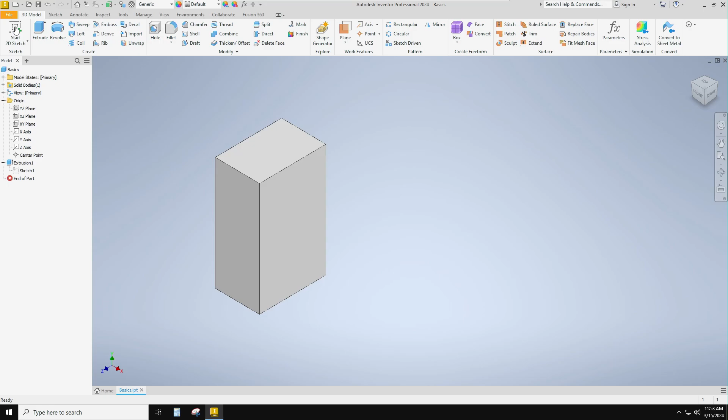Here's how you start a shape. First, you start with the basic shape itself, flat. So I'm going to start a sketch, and I'll make it poke out this side. Okay, so there we go. Start that. And then it goes - oh, here it is. Where do you want it to go?

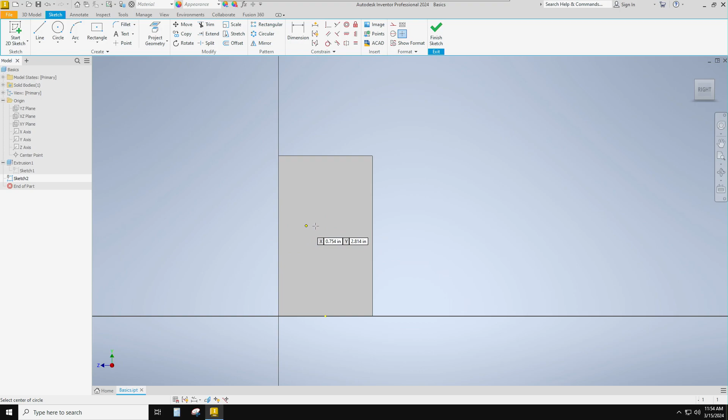So let me just - I don't care where I put it for this assignment. But there, that's kind of a midpoint and a midpoint. And I'll make it kind of big, but I'll type a normal number, 2.5. I'm going to type it smaller - I'm going to make it 1.5.

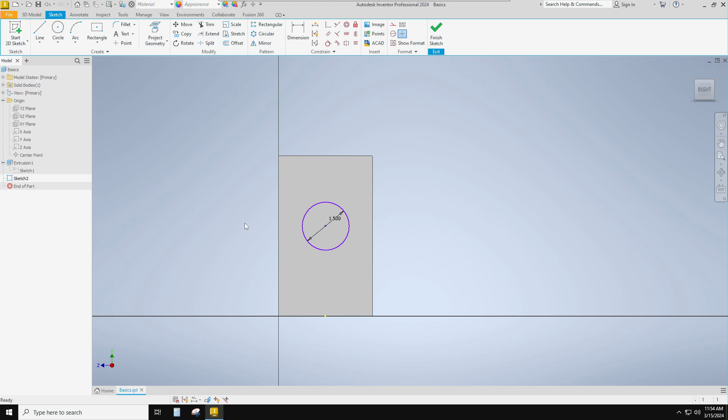Cool. Okay, and there's all sorts of more interesting technical things that we'll do later in our program. You'll learn a lot about Inventor in Design 328, but this is enough for now. It's a very powerful program, and we're doing super simple things.

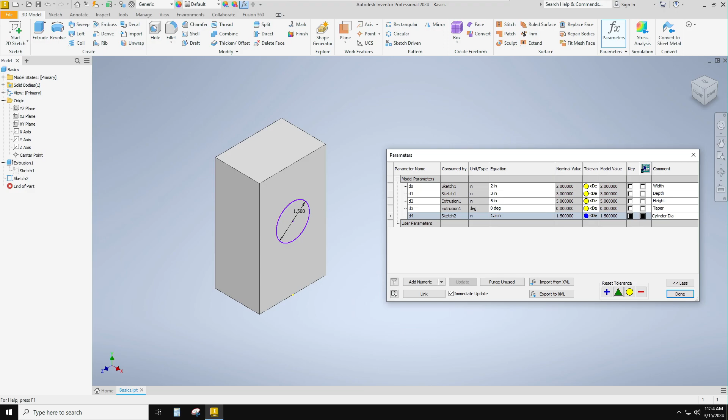So I checked the green box. It's got a diameter - let's see what it says in my parameters now. Oh, there, cylinder - DIA for diameter. And then I need to extrude it.

This is a lot like SketchUp, isn't it? And how far do I want to extrude it? If I want to make it a hole, I can make it go the other way, all the way through. I mean, there's so much I can do with this thing.

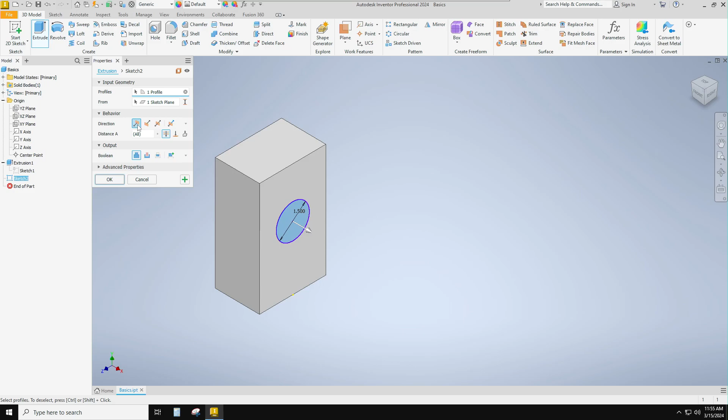Okay, so now I'll go a certain distance, and maybe I'll make it stick out 0.5 inches. And if I want it to have a taper, I can put it on down here. I'm going to have it taper at -1 degree.

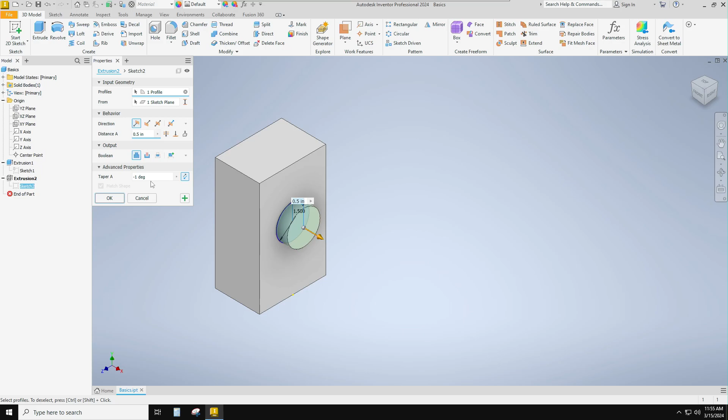There we go. I'm not sure I got that taper in there to lock in - I'm not sure I typed it right. I did - there it is. It's going at -1 degree.

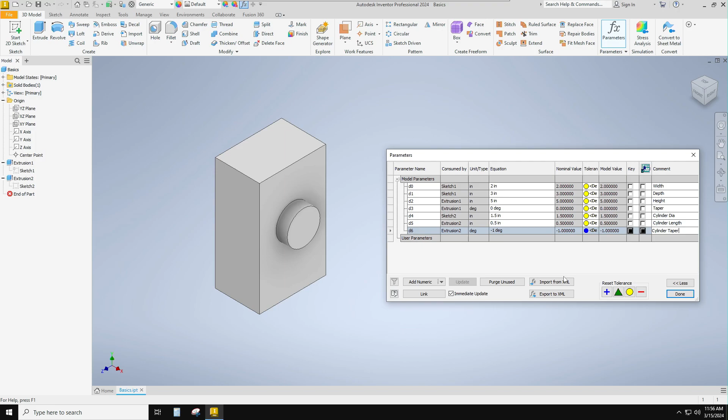So now I've got that thing, and here, 0.5 is the cylinder length - I just type them as I go. And this is my cylinder taper. It's good - even though you know what's going on in your mind and everything, and it's not that complicated - it's just good practice to start doing this, because this is key to design review later on.

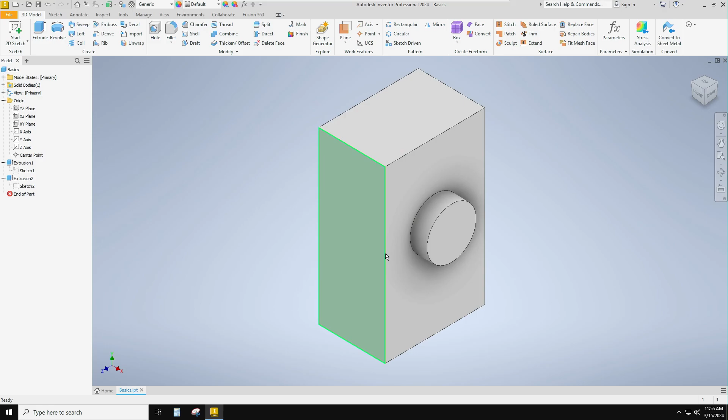So there we go. So now you know how to change sizes of things, add things, and work around with the surface. Oh, also the last thing - double click the mouse wheel, is zoom extents, and then so on.